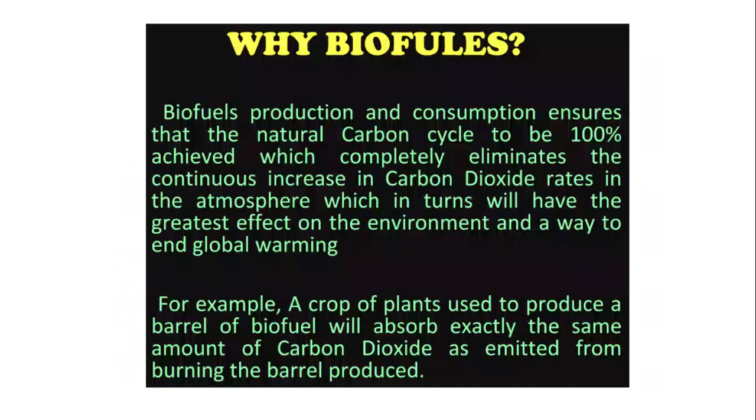So we have covered what are biofuels, including the definition of biofuels. As we know, it has to be 80% minimum content legally derived from living organisms harvested within 10 years. That classifies as a biofuel. It is a fuel consumed or produced from organic products and waste, particularly waste material, not food substances. Bioethanol is made from sugar, algae, wheat, and sugar beet, which are starchy sources, sugary plant products, and biodiesel is made up from oily sources like vegetable oil, algal lipids, and animal fats. Third component, biomethane, which we are going to see today for biogas, can be produced from waste organic material, sewage, agriculture waste, and domestic waste.

So for bioethanol, remember these are sugary, starchy substances. Some are waste, some are other plant materials, but they are fresh, recently harvested, which can be used and dried in a powder form for bioethanol. For biodiesel, these are oily substances, again derived from certain oil extraction processes as a byproduct, like algal lipids, vegetable oil, and for animal fats, it is a byproduct of the butcher industry.

Except that, biomethane is a product of sewage mostly, including agriculture organic waste material and domestic waste, and animal waste, that is the fecal matter of animals. So all this is a part of a carbon cycle, whether you use it in form of sugar, as a source of methane, or as a source of oils. So basically, it is carbon which is playing the role.

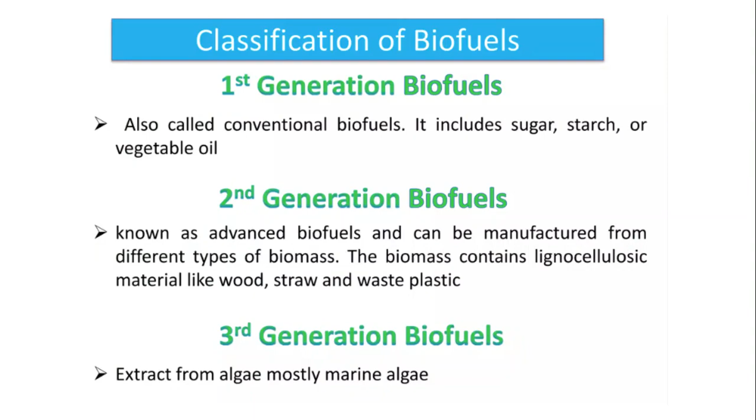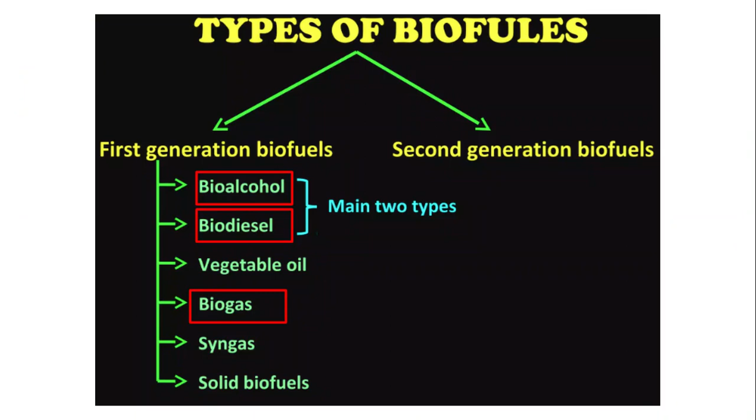We have seen this carbon cycle in the previous lecture. There are three generations of biofuels as we have discussed in the previous lecture; we are not going into detail. So we have covered these feedstocks also based on starch and oily substances. For biogas, we will use waste digestion end products like fecal matter mostly.

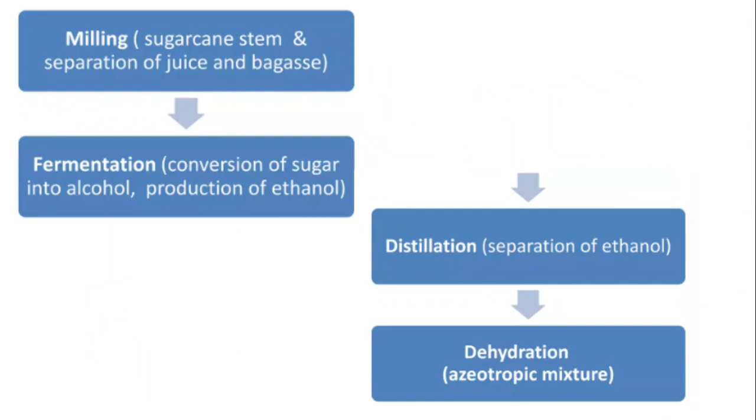So for today's lecture, we will see in detail the process of alcohol fermentation. It starts from milling, that is cutting the raw material into pieces, followed by fermentation, distillation, and dehydration. As we know, for bioethanol you need starchy materials. Starchy materials are generally encased in grain hulls, that means a seed cover is there, or the starch is readily available.

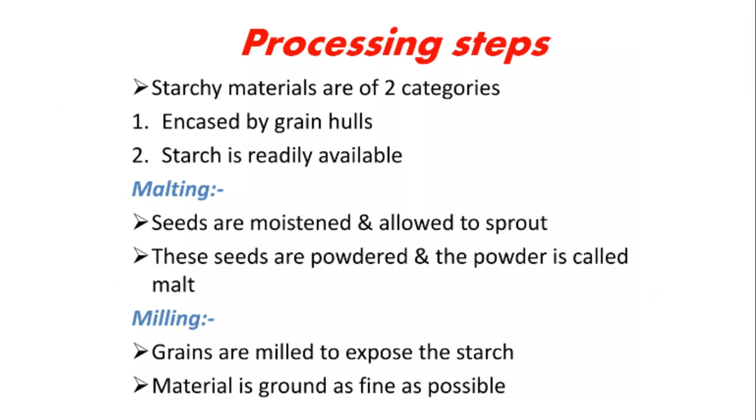So first you have to dehull it using the process called milling, to expose the starch contained in the seeds. Along with that, sometimes before milling or after milling, the obtained seeds are moistened and allowed to sprout. That allows conversion of starch, which is a polymer, into some oligomers. Then the sprouted seeds are dehydrated and powdered, and the powder is called malt. That process is similar to any alcoholic preparation of an alcoholic beverage like beer.

The problem associated with it is that fine flour is difficult to remove in distillation, so we have to use the pot still, which we will come to in the next few slides, to reduce this problem. Followed by this is the preparation of mash, or what is called cooking. Remaining starch is liquefied by boiling under pressure to dissolve water soluble starch. Basically, all malting, milling, and cooking is required to hydrolyze starch into certain oligomers, which can be acted upon by microorganisms to produce ethanol anaerobically.

That's it. So cooking is always done under steam pressure at 100 degrees. All these things are required for proper breakdown of starch, so that in less time it can be further degraded to form oligomers.

Alternatively, you can perform milling and cooking in a single operation without the use of water, which is called mash.

The next step is the conversion of oligomers to fermentable sugars by certain enzymes in the malt, or by acid hydrolysis. Generally nowadays, enzyme extracts are used.

There are three types of enzymes. Alpha amylase produces dextrose or D-glucose. Beta amylase produces maltose, and glucoamylase reduces the remaining starch, meaning more dimers, trimers, and tetramers are produced from oligomers and starch polymers.

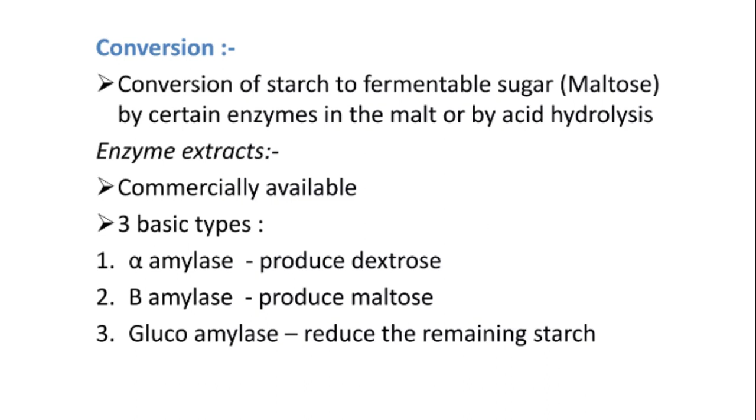In acid hydrolysis, as the name suggests, acid is used to break the bonds between sugars, and the acid has to be neutralized before further processes. This is done using calcium hydroxide.

This is done particularly for those polymers of sugars or starches which cannot be easily converted using microbial cultures and microorganisms.

At the end, pH is stage checked, and cooling coils are used to cool it. Here, high temperature is required, acid-proof equipment is required, mineral acid is used, followed by cooling. So this is the last step before fermentation, which is conversion.

Further, it goes anaerobically from pyruvate to 2 molecules of acetaldehyde, and from those 2 molecules of acetaldehyde, 2 molecules of ethanol are produced under anaerobic fermentation. We know that after glycolysis, glucose produces two pyruvate molecules.

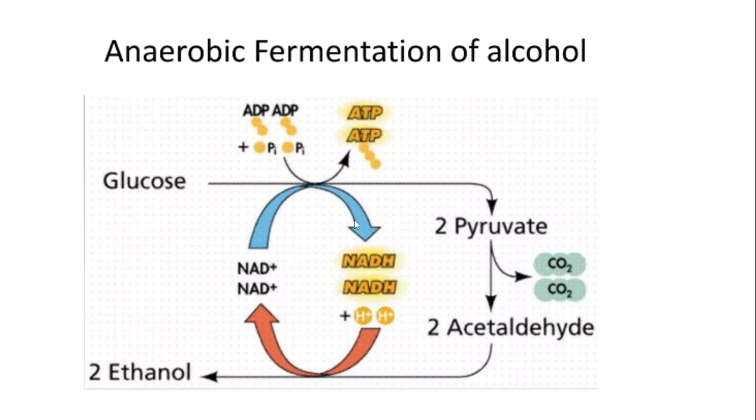Here you can see the carbon dioxide going out of the system. Along with that, it later gets reduced to form alcohol. Meanwhile, NAD and NADH are used, where NAD plus is used as an oxidizing or reducing agent.

Ethanol is used as a solvent, mostly as a chemical solvent, and for our interest, it is used for fuel in internal combustion engines. As we have seen in the previous lecture, it is generally combined with petroleum, because using absolute ethanol for engines requires very good engine modifications, which is not always possible.

Which organisms are used for ethanol production? Mostly they are yeast, though many bacteria can also produce ethanol. Depending on the source, you can get different end products like other alcohols such as butanol, isobutanol, or propanol, organic acids like acetic acid, polyols, and ketone gases, depending on the culture selected.

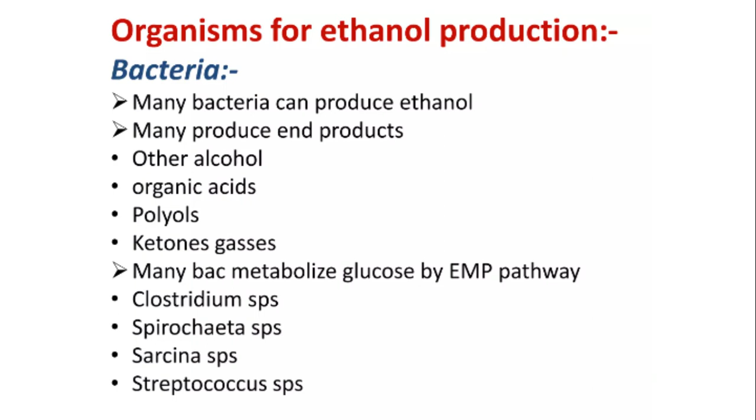Mostly we come across yeast because they are of interest due to high ethanol yield, high growth and fermentation yield, and good osmotolerance. This is important because harsh conditions like acid are used and then neutralized at the end, but yeast remain good candidate organisms for producing ethanol, being very sturdy under physical and chemical stress.

Coming to raw materials for ethanol fermentation, mostly they are starch, cellulosic, and saccharine materials. Saccharine or sugar-containing materials include glucose, fructose, maltose, and 6 to 12 carbon sugars found in fruits. We cannot use fruits directly, but we can use remaining or thrown-away parts, using residual sugars from them if available.

Otherwise, fruits that have gone beyond the stage of eating can be used, because they will have more simple sugars compared to starch. For example, over-ripened banana or over-ripened grape cannot be consumed for edible purposes, but can be used here. Ideally it should be over-ripened, or gone ahead of the eating stage, since they will have more glucose, fructose, and maltose, and less starch.

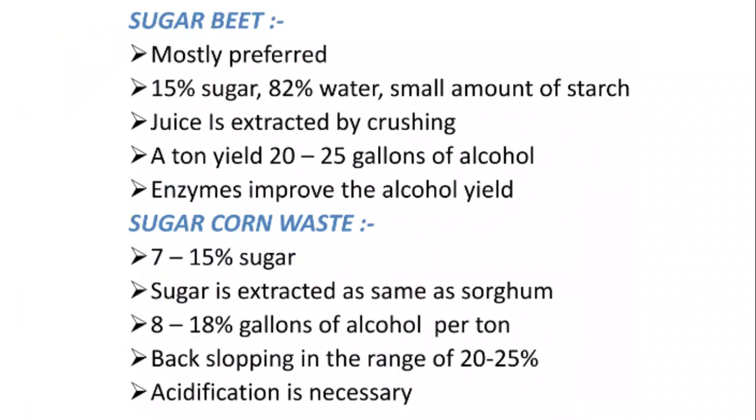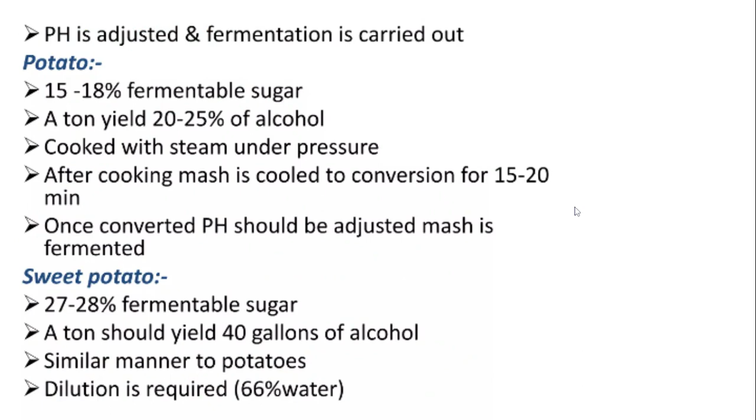For alcohol fermentation, generally batch fermentation is employed, having a fermenter volume of 600 meter cube. These are the standard parameters followed in the trade generally for actual production scale, not lab scale.

It is a long-term process because first glucose has to be produced, and the produced glucose has to be converted into pyruvate, which anaerobically produces alcohol. So in the first 3 to 4 days of this 12-day process, we are just allowing the yeast or inoculum to grow, and after growth it undergoes anaerobic fermentation to produce ethanol.

These are the maximum productivity guides. In 1 hour you will get around 2 grams of ethanol. That's why you need more days to achieve a comparably higher yield.

For our country, it depends on the quality of molasses. The max yield you can get is 95%, which is quite impressive.

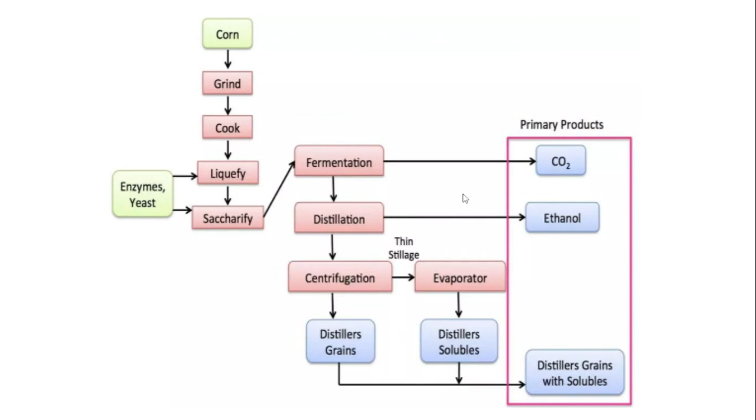So, okay, we have carried out fermentation and all that. Now we know that there is ethanol in the system, but how do we recover that?

It's mixed with everything - leftover biomass, leftover substrate, which is still in minute quantities of starch and other materials. We need to recover the ethanol.

This depends on where the end product metabolite is located. In general, product recovery focuses on whether your material of interest is intracellular or extracellular. For us, it is extracellular, in the medium. So we are not going to use the cells; we will collect the cells separately and the liquid medium separately for alcohol recovery.

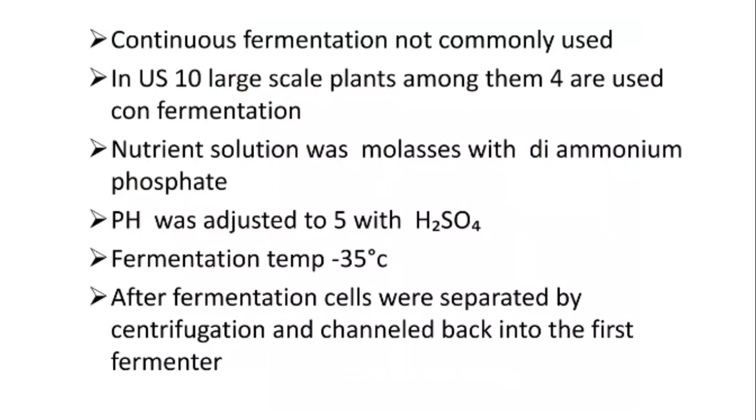Cells, as we have seen, can be reused here. In this separator, you can reuse those cells in the fermenter by removing them from the liquid medium, and then you need to separate those cells from the medium.

You can have a very big centrifuge to separate the cell biomass. This is a less frequently followed step - centrifugation is the least followed due to the scale associated with it. So flocculation is the first step, in which a flocculation agent allows this process.

What is flocculation? It is any agent which brings two cells of the ethanol-producing microorganism together, producing large cakes of biomass by removing the solvent or liquid layer in between. So it produces large aggregates which settle more readily than single cells.

Other than that, you can have flotation by introducing gas into the liquid. Just bubble CO2 or any other suitable gas, except oxygen of course - you can bubble any inert gas like nitrogen or helium.

You can have the flotation - the cells get trapped into the gas bubbles, and as bubbles are lighter than liquid, they move to the top of the vessel. On top, you have the cells along with that froth. You just collect the froth along with the cells and remove them from the bioreactor.

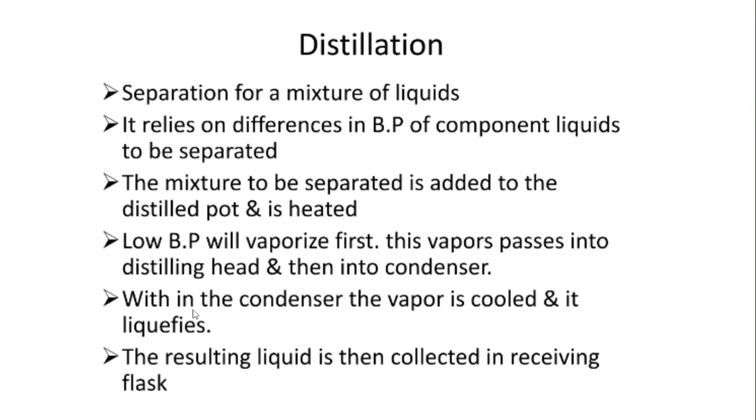Distillation involves separation of a mixture of liquids. You know the distillation process quite a bit, so we are going to move fast. Low boiling point solvents vaporize first. The vapor passes into the distilling head and condenser. Within a condenser, vapor is cooled and it liquefies.

In ethanol fermentation, you will have this in the distillating pot - you will have more H2O in the liquid. Most of the ethanol, due to its low boiling point, will be in the head space, and ethanol vapors will go to the distilling head and condenser.

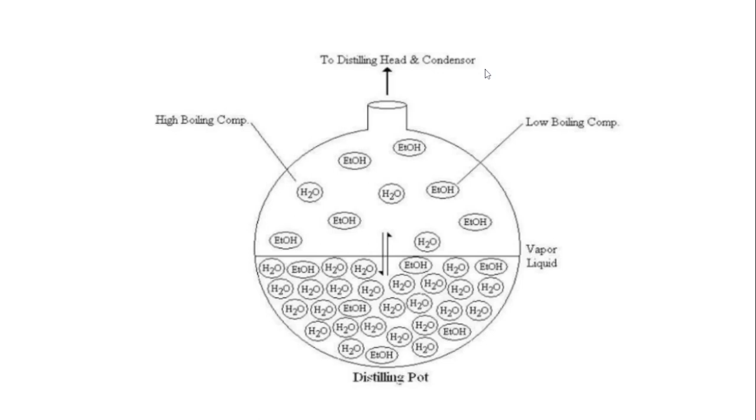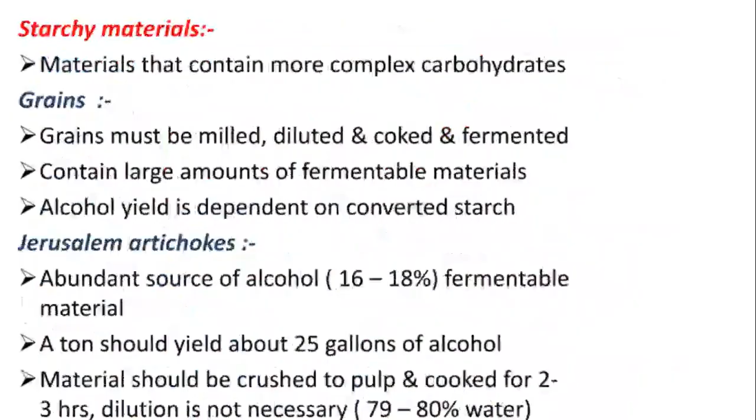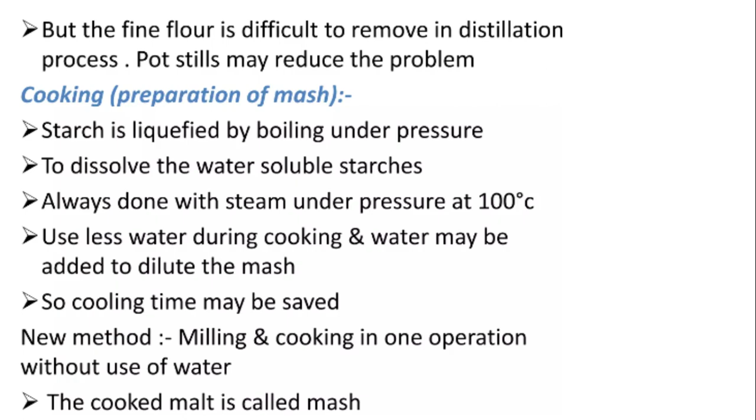Fine flour of the raw material used is difficult to remove in the distillation process. This particulate matter of raw material, whatever starch source you are using - it may be sugar cane, sugar beet, or similar - creates a problem apart from cells. So you can't use conventional distillation like in your labs, plus the scale is quite high. The pot still offers a convenient way to do that distillation.

You have a hard container provided with a heating element. It will heat the container and the mash, and the vapor will contain your ethanol and water. It gets cooled in cold water. So this is the boiling chamber, this is the cooling chamber, this is the water jacket and condenser.

So the drainage - cold water comes in and drains. This happens due to the water jacket's contact with this hot spiral pipe, where steam with vaporized ethanol is present. Heat exchange occurs and this warm liquid comes out from the drainage. You can recool it and provide it as cold water again, or just send it to effluent treatment and get rid of it.

As we have seen, ethanol has a boiling point of 78.5, and water's boiling point is 100 degrees. So you can use this difference in their boiling points for distillation. If you want very high grade ethanol, you can purify it using GLC or HPLC, particularly preparative grade, so the column size and diameters will be very huge.

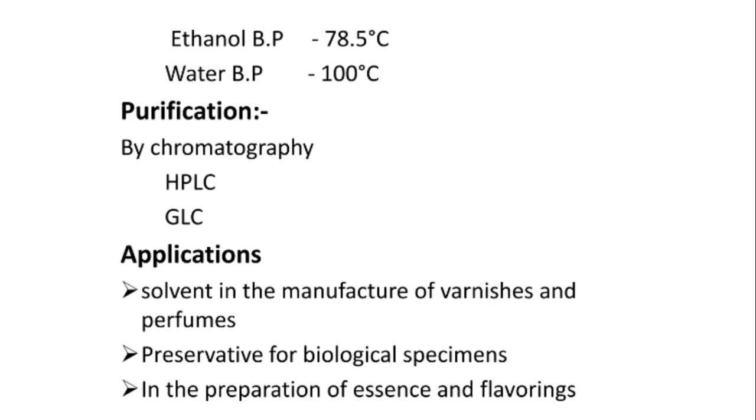So these are the applications of ethanol apart from biofuel. We are not going to detail with this.

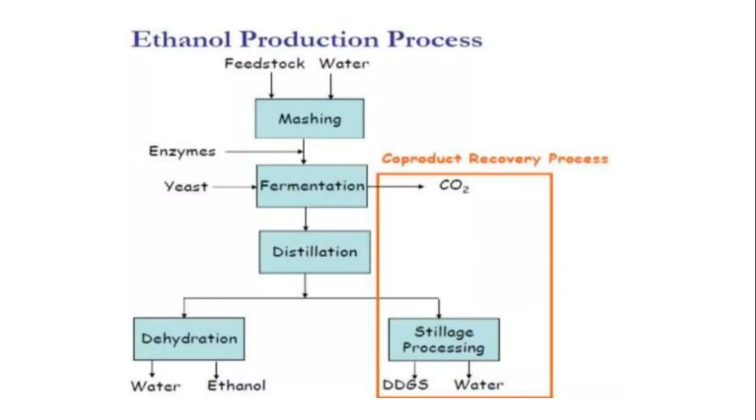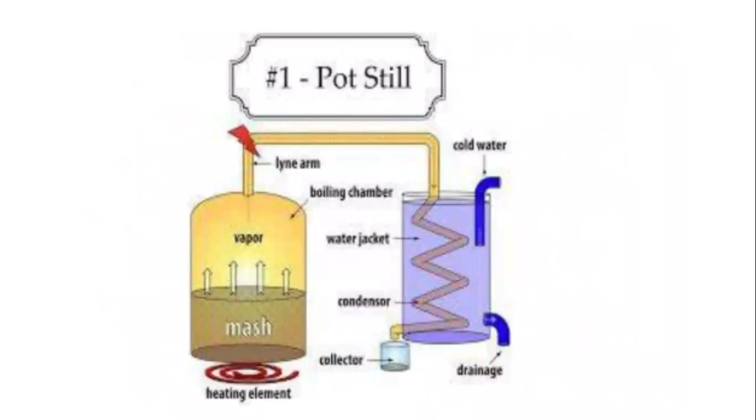So what we have looked into right now is this process, which we majorly skipped in last lecture, which is product recovery. What we have seen in product recovery, there are separation of cell biomass, separation of fine particles of raw material or starchy substance using pot still, and there are different separation of cell biomass methods: flocculation, flotation, filtration, and centrifugation.

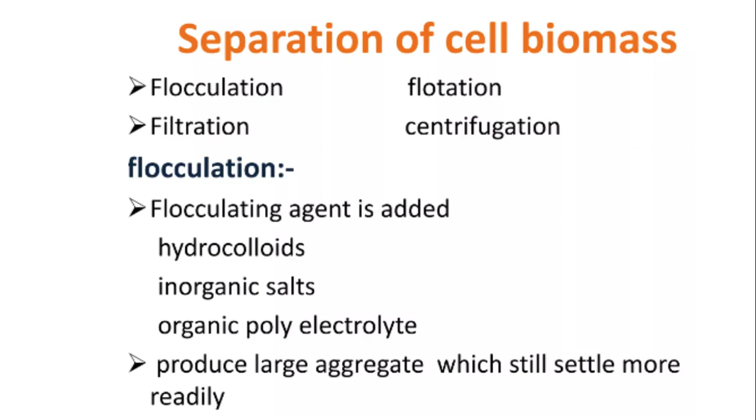Most important methods are flocculation and flotation. In flocculation, you add a flocculating agent so that it will combine all cells together to form large clumps, which will settle under the influence of gravity. They will settle at the bottom of the reactor, and it can be removed. Otherwise, you can move all the cells up by introducing gas into the liquid by flotation.

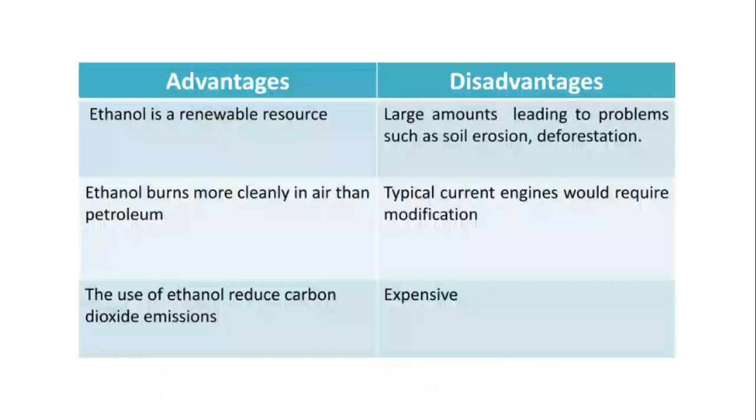So we have discussed already advantages, disadvantages in last lecture. I'm going to skip this biodiesel part. We have already discussed this.

So coming to the next part, which is remaining from module 3, is biogas. Biogas is nothing but a gas produced by breakdown of organic matter in the absence of oxygen. So remember, in bioethanol also, in biogas also, you have to have absence of oxygen. That's why there are no aerators and there is no open lid or open system.

It's always closed and under a pressurized system. So for alcohol fermentation reactors, they will not have any aerators, but they will have agitators. That means mixing of liquid contents is allowed, but not aeration, not introduction of air.

So like bioethanol, it's still a renewable energy source like solar and wind. It can be produced from sugarcane waste, maize silage like that. But it is mostly produced by green waste, municipal waste, sewage, manure, such things. So depending on the waste, you can have either biogas, bioethanol, or biodiesel, right?

So biogas, why is it important? Because it has certain greenhouse gases. From a climate change or greenhouse gas point of view, you are using these two main greenhouse gases, CO2 and CH4, methane and carbon dioxide, for a good purpose. They are getting burnt as a fuel instead of getting released into the environment.

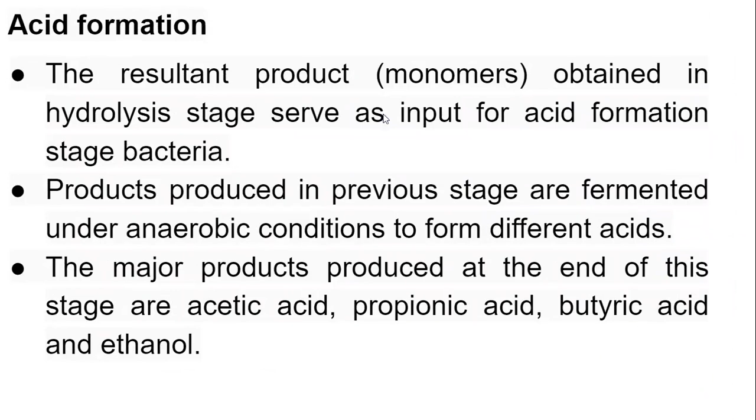The result product from hydrolysis serves as an input for acid forming bacteria. They will produce acetic acid, propionic acid, butyric acid. So they will acidify the medium, followed by methanogens, which will use this acetic acid produced in earlier steps to convert them into methane and CO2.

These methanogens are obligatory anaerobic, very sensitive to environmental changes. So this stage is more critical. It utilizes intermediate products and converts them to methane, CO2, and water. Methanogens are sensitive to high and low pHs, and it occurs only between 6.5 to 8. So if you have got higher acid production and less methane formation, it is of no use.

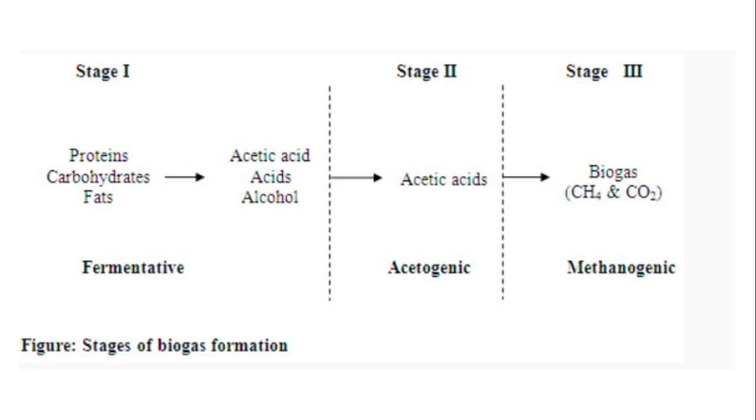So these are the reactions involved. These acetoclastic methanogens use this acetic acid to produce methane and CO2.

So it is used for various purposes: electricity generation from gas for burning purposes and engines, cooking, heating, lamps, mechanical energy, like this.

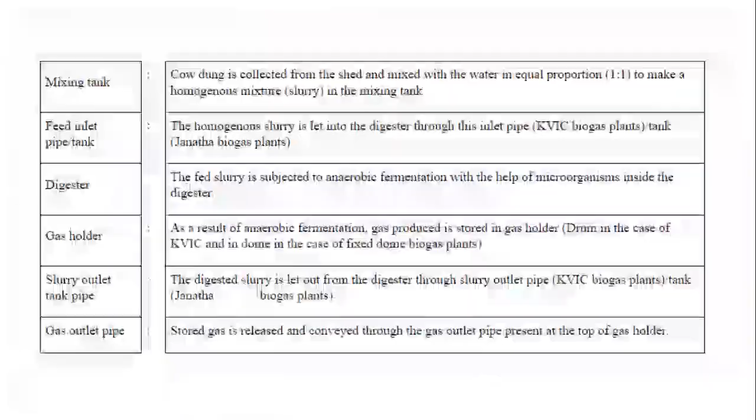What is the advantage of biogas? Biogas slurry is what you get after digestion, which comes out through this outlet tank, whether it is a Deenabandhu plant or a floating drum plant.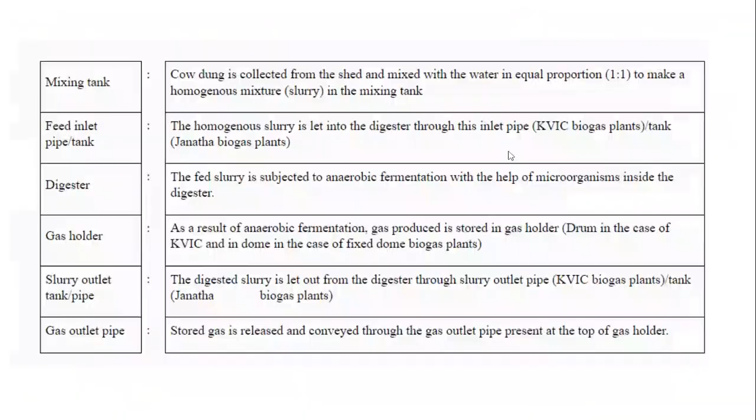The slurry or the overflow can be used as manure for fields. Why? Because it is odorless. If it is odorless, that means it is complete. So for all types of manure, not only biogas, whenever you see that manure is having odor, you throw away that manure. That manure is not a manure, it is still undergoing the process of fermentation. All manures are odorless when fully digested, like this.

As it is odorless and everything is utilized, naturally it will not attract any insects or flies in an open condition. Apart from that, surprisingly, it will repel termites because it has no starch, but it has some other components which are toxic, and their pH has been varied, so it will repel termites.

And raw dung, if you can dry this product out, removing the water or solvent part in it, you can use it as a farmyard manure.

But if the dung is raw, that means your manure from the sewage of animal and human waste, it attracts insects and flies, and they can harm plants fertilized with it. So when it is completely digested, it is safe and good to go.

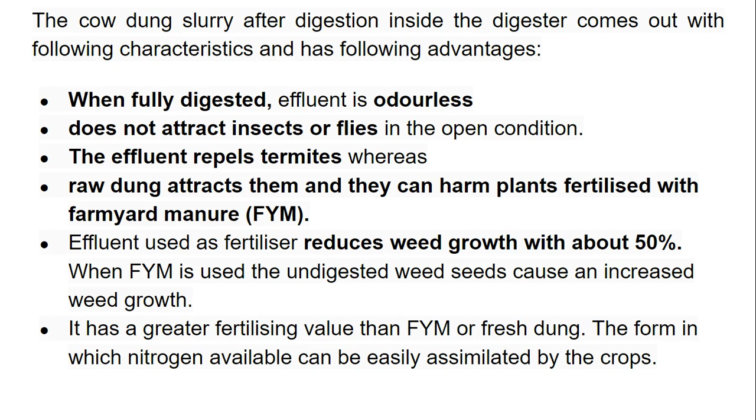Now coming to the last part, why don't we see biogas in vehicles? If biogas has to be used to power vehicles, there are certain barriers. First, we have to get rid of CO2 because the presence of CO2 lowers the power output from the engine, plus it takes space in the storage cylinders.

Thus, they reduce the range of the vehicle, and it can cause problems of freezing at valves and metering devices. So CO2 has to be removed from biogas, and then you have to pressurize the biogas to be packed into a cylinder, which increases the cost dramatically. So from a cost-benefit point of view, it is not good to have biogas in vehicles.

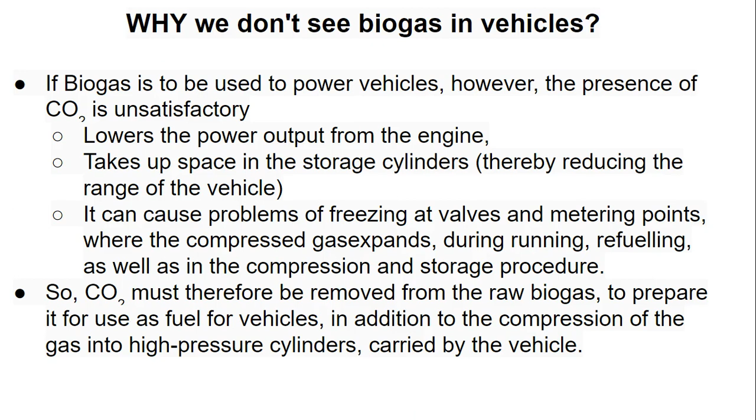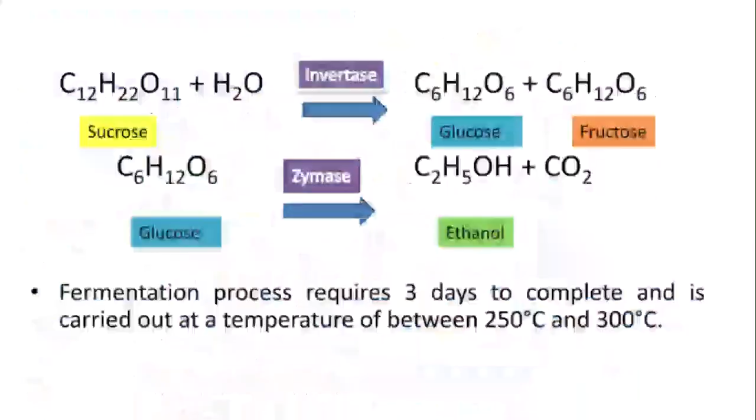So coming to the end of this module, we have almost covered module 3 in this lecture. Next time, the only thing remaining in module 3 is the production of hydrogen gas, which will be covered in another video. Till then, we have covered all these points from 3.1 to 3.4, including biodiesel from hydrocarbons.